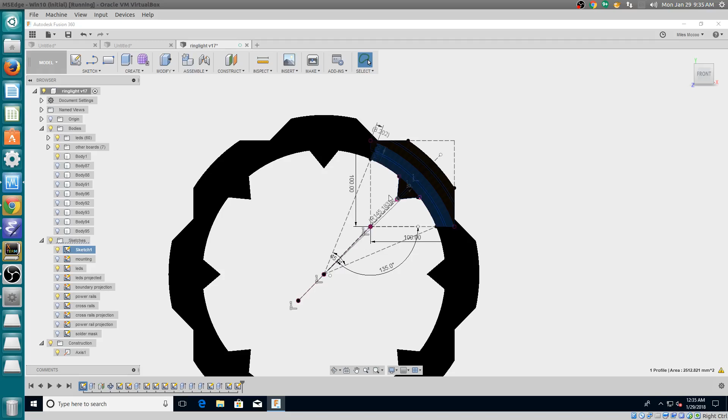Here is the basic design, and in Fusion 360 I can also model that it becomes a ring to ensure that the mounting holes are in the right spots, that everything will come together nicely. Also, it enables me to draw some of these other structures a little easier than it would be in KiCad. So for example, I am able to lay out the placements of the LEDs in a nice ring so they can also look kind of nice.

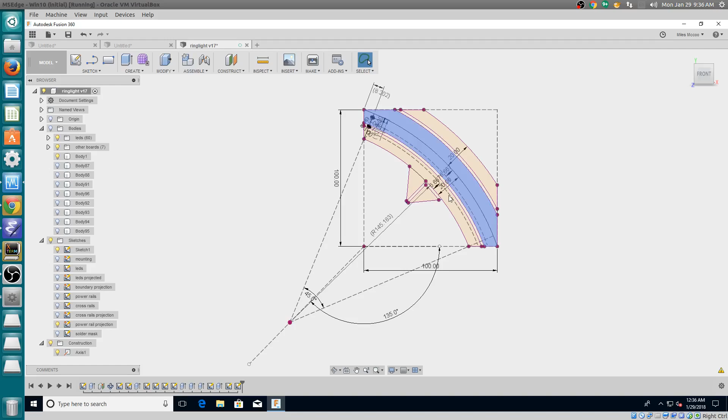I have my power rails here. Let's turn off the LEDs there. I have the power rails drawn. In the middle I have ground. On the edges here I have power and power again. So the next PCB will connect to here. Additionally, I have a solder mask here along the edges, so there's a triangle here. Let's see if we can make that a bit more visible.

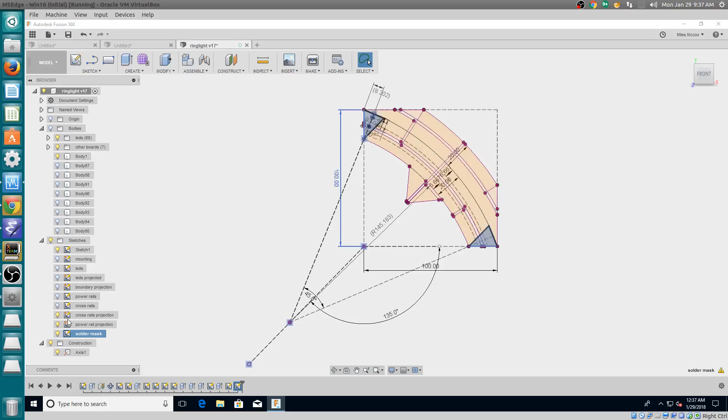There. So a solder mask enables me to solder adjacent boards together, as well as having them connected via these mounting holes. Additionally, I have cross rail. So this power rail is in the back of the design. On the front, I have the other orientation. So as you can see, on the front, I have power going sort of a vertical, diagonal type of direction. So here we have power is on the left and ground is on the right.

Here we see that, let's turn off the masks. Here we see that we have on the bottom here the power rail, and in the middle we have the ground, and then on the top we have power. And again, all of this was drawn in Fusion 360.

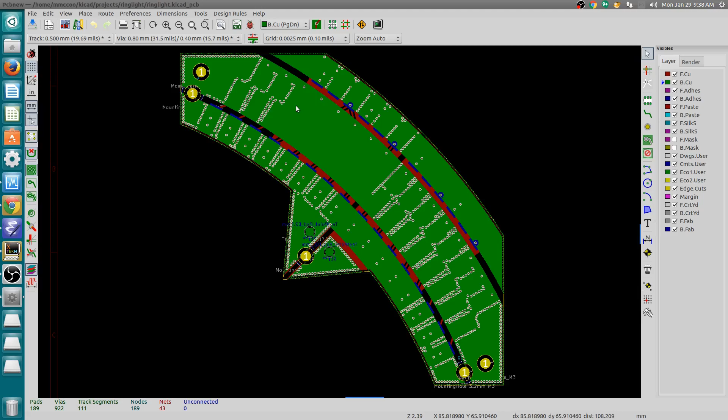Additionally, if we unfill the zones, because these power rails are just zones, a fair amount of routing, we have vias here as well on each of the pads, which also will help to get some heat away from the LEDs. I have some zone fill vias here to be able to connect the front and back power rails. Almost all of this is done in scripting.

From start to finish, once you have the scripts in place, it's maybe a half hour of actual wall clock time to get this design done. So in this video, I will demonstrate each of the scripts, but I will not yet describe how they work. That will be in a separate video. So let's get started. I'll start with a blank slate.

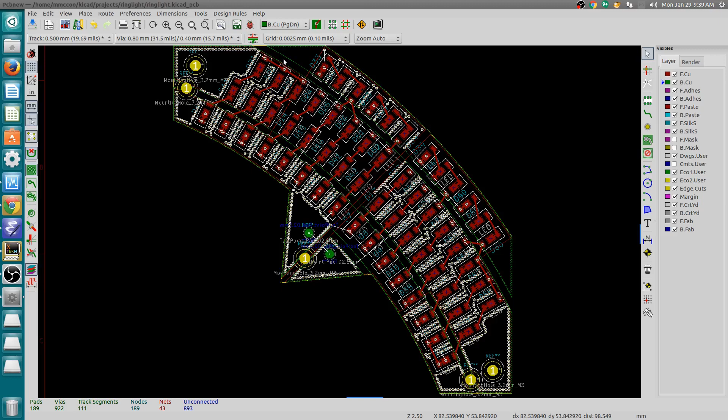Here I have the schematic. It's a fairly uninteresting schematic. It's simply 3 LEDs in series. These will be powered by a constant voltage supply, topping out at 12 volts, but I'll also have a step-down converter to enable less than that. In my experiments, I found that these LEDs draw about a third of their rated power at 12 volts, and even that is fairly bright.

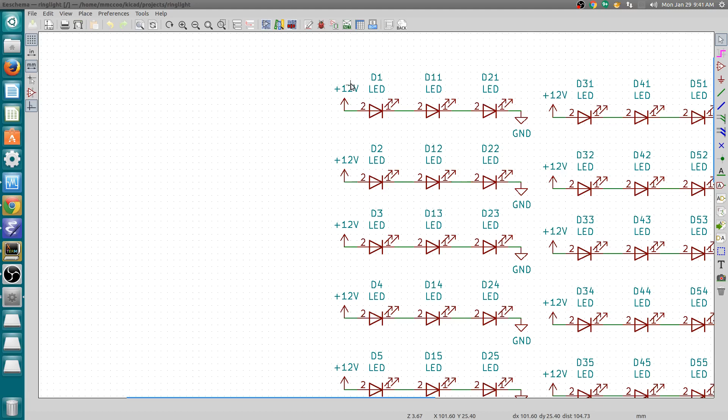If I were to crank up the voltage even further, the power consumption goes up, but the light emission as measured by my light meter does not go up linearly with that. So driving them not so hard actually shows more efficiency. So it's a total of 60 LEDs in this configuration. So let's go to pcbnew. Okay, so I'm starting with an empty

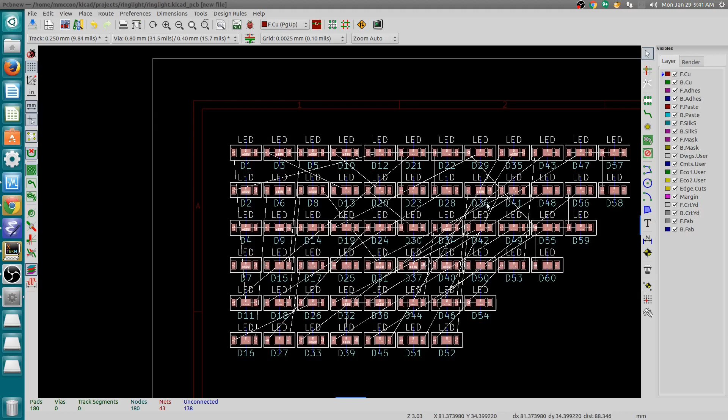design. First thing, of course, we need to do is import the netlist, and here we have all of our LEDs. One thing that I don't really like about KiCad is that the placement that you get here is fairly random, and there's a lot of crossover, and trying to move them into place would really be a chore. So the first piece of automation is a plugin that I wrote that takes the schematic placement and applies it to your PCB.

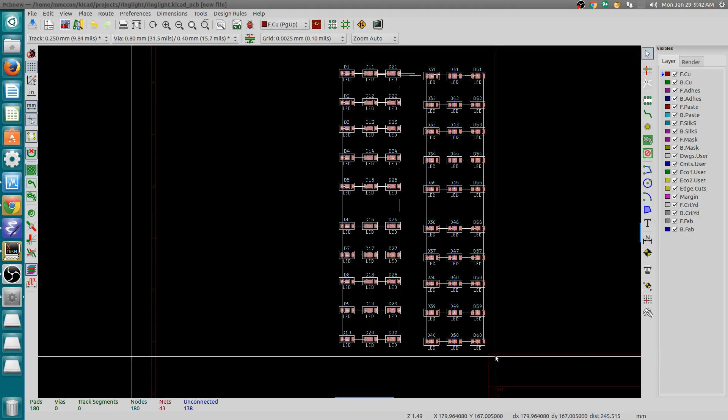Now I know what is what, and also the ordering of the LEDs makes sense, at least relative to the design that I made. All right, let's move this to the side. How do I get the LEDs to match this orientation? Well, here comes the first scripting task. So here we have a sketch that contains the outlines of all of the LEDs.

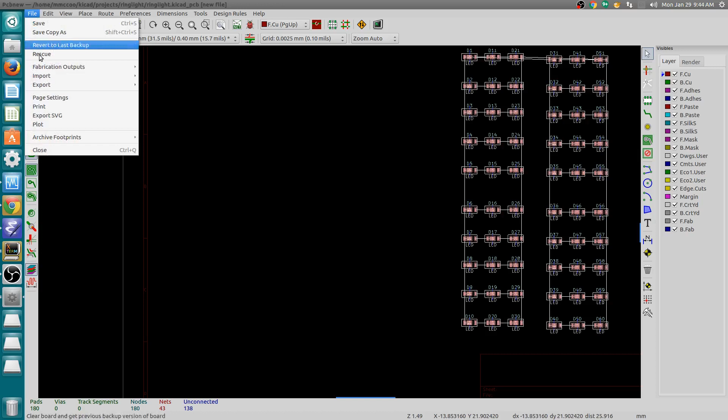So for that, I will export the DXF, save as DXF here, and then I save it to the file. I've already saved it, so I won't do that. Coming back into PCBnew, PCBnew actually does have an import DXF file feature.

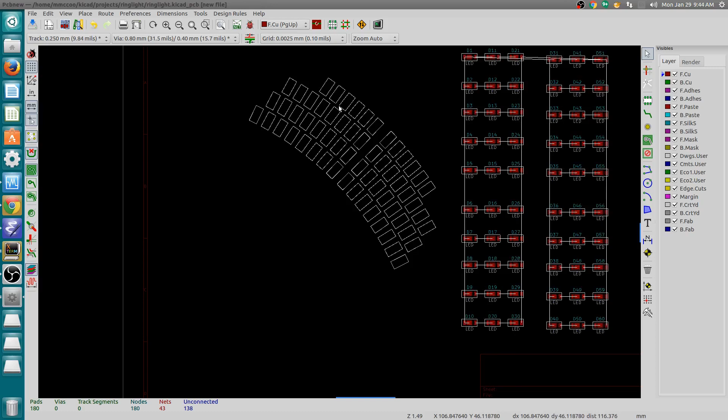Import DXF works for what it is, but I find that there are a number of disadvantages. For example, when you hit OK here, I want to place it at the center of the page. Okay, fine. I do OK. And the first thing it does is it follows my cursor. Okay, well, if I have several layers that I need to overlay, how do I get them to be exactly in the right spot?

So instead, the first scripting task that I want to do is to import the DXF onto a layer within pcbnew. To make DXF import possible, I put together a library that will read the DXF file, and then it will walk through all of the polygons, calling a callback to a particular set of actions. So in this case, what I want to do is simply traverse the DXF, and whenever it finds a polygon, for it to call a callback within segment actions, which in this case says I simply want to put a polygon onto this layer.

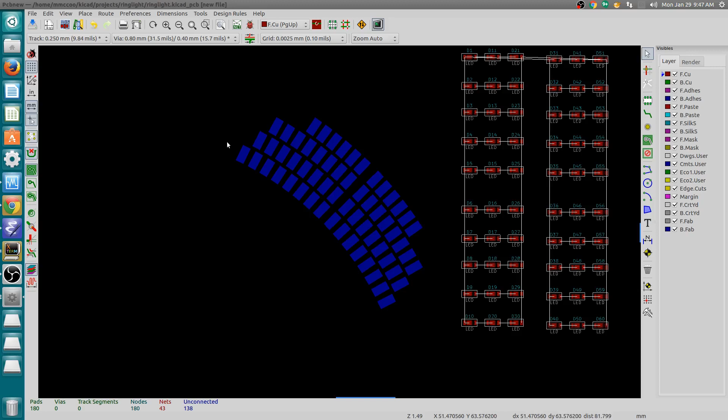Okay, so this is a script that we'll come back to several times. Here we'll turn on the first step, and let's run the script. Okay, so now on the comments user layer, we have each of the rectangles from Fusion 360. At this point, the next step would be to move each of the LEDs into place.

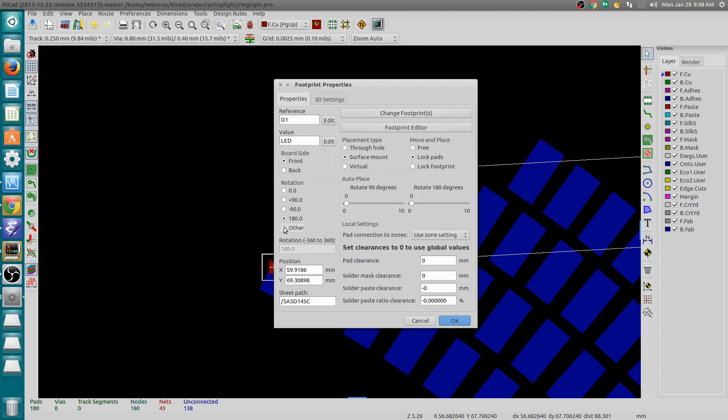Now here you'll see that the orientation of the LEDs is not actually what we had hoped for. So we could go into the edit properties mode here and tell it, hey, I want some other rotation. But what is that rotation? And in this design, that angle is not constant. As it goes around the circle, you'll have an increment. So I have a better way. So what I need to do first is at least bring each of the LEDs here into the proper position.

In order for the script to work, I need each of the LEDs to have its center point be somewhere within the polygon. It doesn't need to be centered, but it does need to overlap. The center point needs to overlap the polygon. So here you'll see that I've moved all of the devices into place, at least so that the center point of each device is overlapping with the placements that we just loaded.

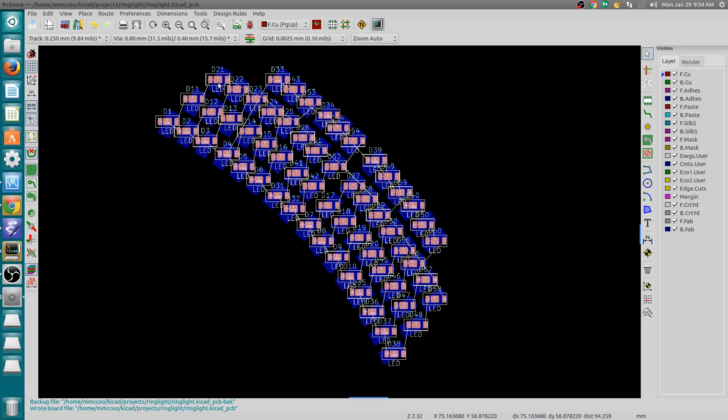All right, so now the next step is to actually orient the devices the way we want. Let's go back to our recipe. We don't need to load in the placements anymore. Now what we want to do is do an orient action. And I will explain each of these functions in separate videos. The traverse DXF, traverse graphics. In this case, you can either read it from graphics you already have on the screen, or you can read the DXF again. So in this case, I am going to turn on the orientation part.

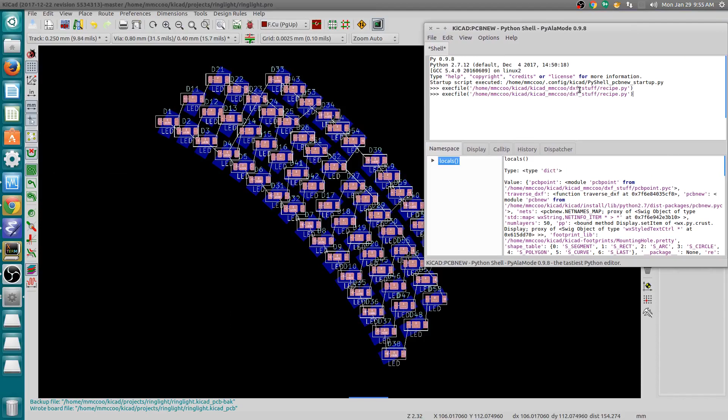Any footprint of this LED 5730 will be affected. So let's go ahead and run that now. Running the same script again, different options turned on, and here you'll see now that each of the devices has been oriented properly. The way that it works is that for each polygon that it finds, it looks to see, is there a footprint of the particular footprint type whose center point is within that polygon? If so, it looks for the longest edge on the polygon, and then it orients the device to be the same direction.

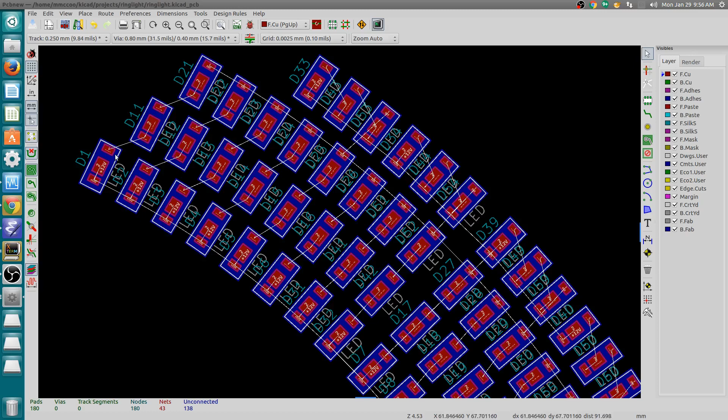So now I have the devices basically where I want them to be. I see here that I have power going along the bottom. I have ground going along here. Since we have 3 LEDs in series, 1, 2, 3, 1, 2, 3, these are all aligned. So these are all the way that I want them to be. I will have power rails along the bottom and top, and ground in the middle. So those will all basically connect themselves.

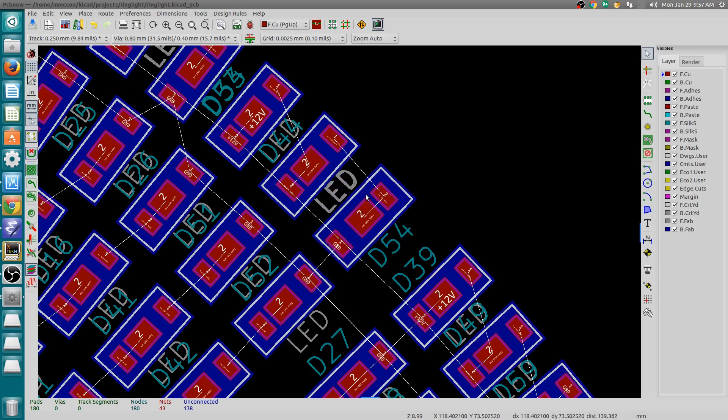The 4 exceptions to this are this one here, for example. The ground here is on the top, but because the power rail here is along the top, I would need to route through here to get to it. So instead, I simply rotate it so that now these 2 grounds are adjacent. The bottom power rail goes along here. So it's a simple wire to wire connection here. I need to do that 4 times in this design. Rotate, rotate, rotate, rotate. Now I have the placement that I want.

Okay, now let's work on the actual power rails. So in Fusion 360, I have here the back layer. I have ground in the middle, power here on the bottom, power on the top. Additionally, I have a small area of ground here because this is where the actual wire connections will be to the board. Again, I save as DXF.

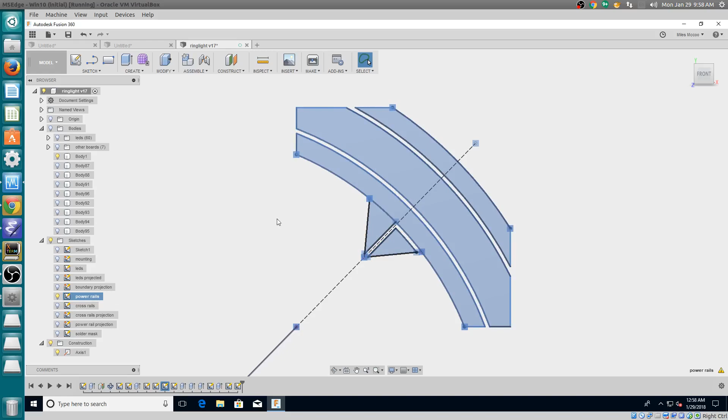I do the same thing for this as well as for what I call the cross rails. So in this case, I have on the left here, I have power. On the right, I have ground. This ground here will extend to the left to enable connection with adjacent PCBs, as well as the power one here on the bottom. This is the front layer of the PCB.

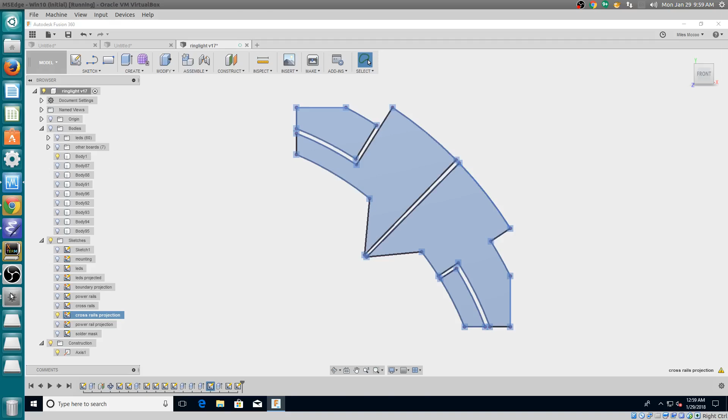Coming back into KiCad, once again, I come to my recipe script, turn off LED orientation. Now I will call traverse DXF again, and the action in this case will be a zone action, saying, hey, I want to create a zone for each of the polygons that you find on the back layer for power rails. Let's turn that on. And the front layer for the cross rails. And while we're at it, let's also add the boundary of the entire design.

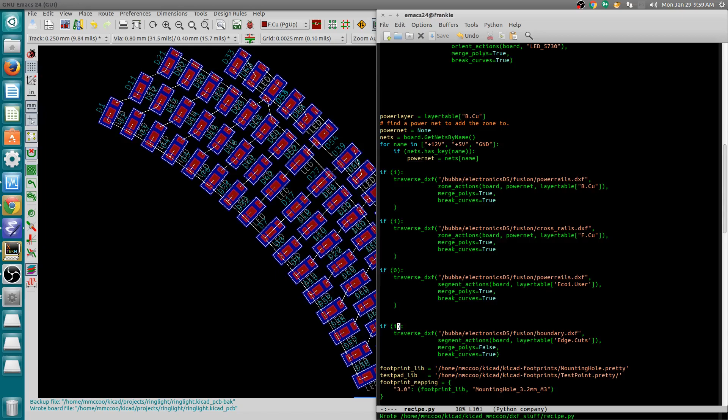Okay, save that again, come back into our scripting console, run that again. So now we have some zones. We fill them. Not everything will fill. The front stuff, of course, will fill because there are the LEDs. For the bottom layer, we don't yet have anything really to fill, right? But again, we'll see that power here goes to the left on the bottom, and then ground goes above that as well on both sides, left and right.

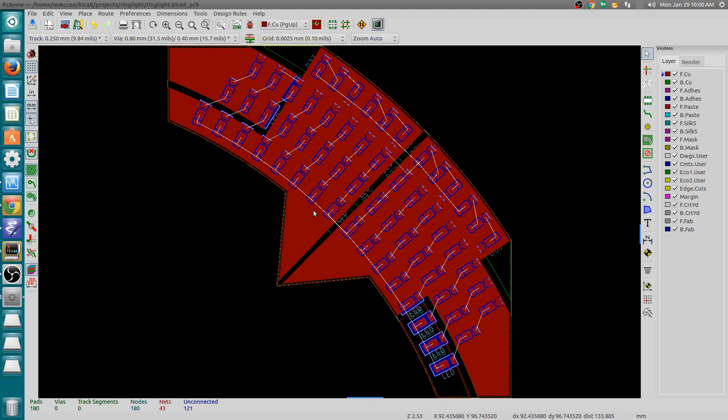But at this point, the script doesn't know which nets each of these zones should connect to. So by default, it just puts everything on ground. So we need to change that. So here, this zone needs to be on +12. This zone needs to be on +12. This top zone also needs to be.

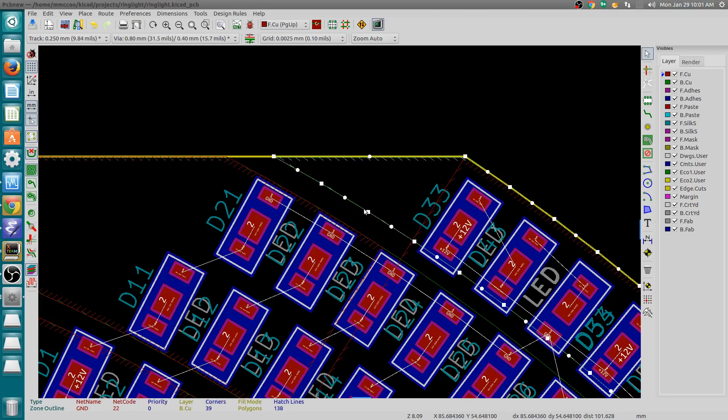Now for this top zone, one thing that I found is a little weird is that Fusion 360 sometimes will give me 2 polygons when I really only wanted 1. I imagine that I actually drew 2 polygons in there somehow. So for that, I will simply take one of them and delete it, and I am left with 1 that I can then change to power. Also here on the other side, the front copper needs to also be +12.

All right. So now let's start making some connections. Because this is an LED board and it will dissipate a fair amount of heat, the way that I want to connect the LEDs to the top and bottom power rails is by having vias for each of these power areas. That will help make the connection to the back layer a bit more robust, thereby helping to dissipate some of the heat. So let's see, how do I do that?

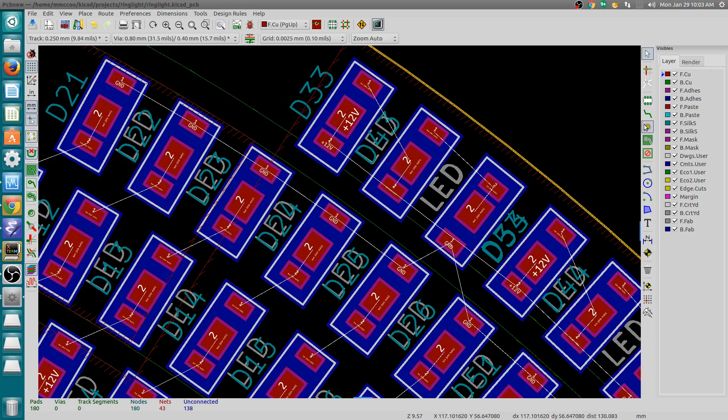Now we could just use this thing here, but in this case, I would like them to be centered. Now I could use gridding, but the problem with that is because I'm on an arc here, sort of a polar coordinate system, there's not really a grid that has the center points in the right spots. Additionally, there's an awful lot of these. For each of the LEDs, well, there's a total of 60, 2/3 of which are power, and each of those has 1 or 2 connections. So again, let's do some scripting.

Here what I have is I go through each of the modules, for each of the pads. If that pad is one of the net codes that I want, power or ground, then I simply put a via in that location. Fairly simple. I've already talked about this on my blog. So let's run it. Coming back again to the scripting console, I have my ground vias script here ready to go. And so we can see that now I have vias in all the right places. They're nicely centered on each of the ground and power pins.

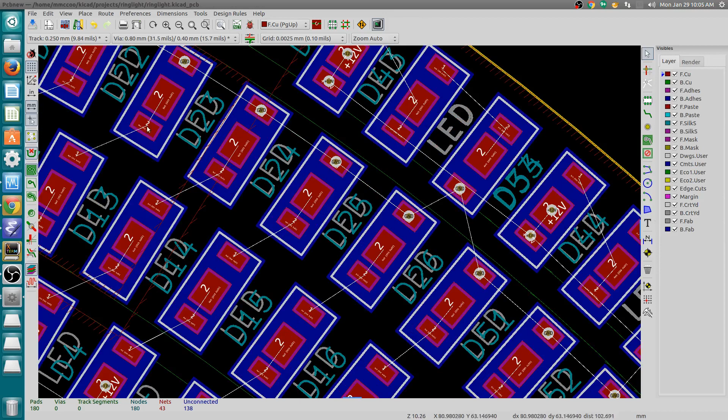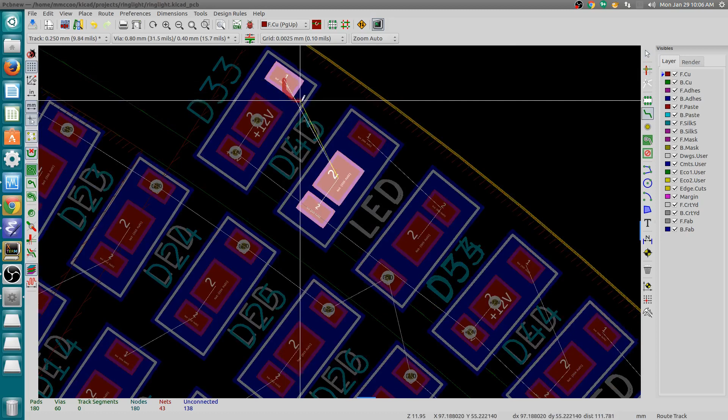Easy peasy. And at this point, I can also do zone fill, and everything will fill. The one exception here is this ground connection zone here, which will be connected shortly. All right, so now we have a whole bunch of nets that need to be connected. Now I could use the point-to-point router, but I found that especially on the non-45-degree placements, getting it to actually route the way I want is tricky. I've tried all of the different options available in the preferences menus, and what I really want is just a wire from here to here, a wire from here to here.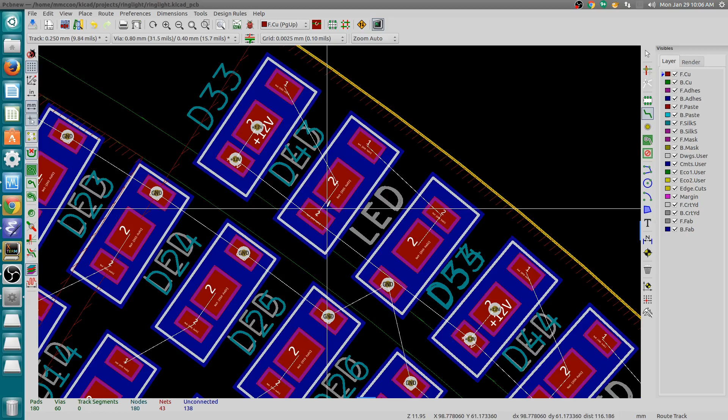Also, even if it's possible to do it with the point-to-point router, there's 60 of these LEDs. It's a lot of work. There's a lot of clicking. Me, I prefer to do scripting. So for that, I have a script that will generate the minimum spanning tree of all of the nodes within a net, and it will blindly make point-to-point connections between those.

It does not try to do any obstacle avoidance. It doesn't try to be fancy in any of those ways. So it's certainly not a general purpose router, but in this case, it does the job. Let me show you how it works.

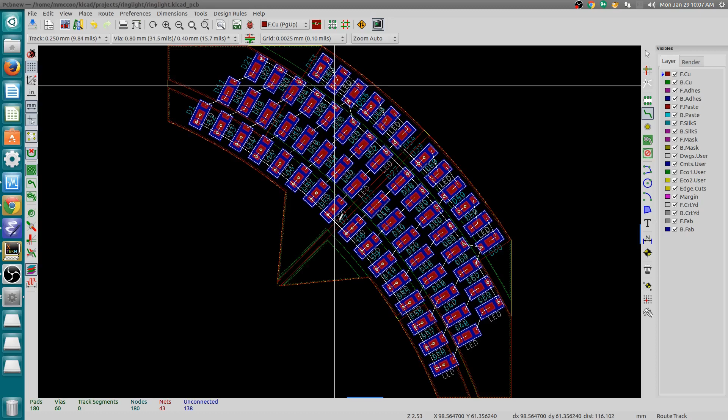So here I have a script. I call it Delaunay because it generates the minimum spanning tree based off of a Delaunay triangulation of the points, which may be interesting, but you probably don't care about. The part that I do want to maybe highlight a little bit is that SciPy is a nice library that provides a lot of routines for computing things like minimum spanning trees and Delaunay triangulations.

And you see here, the script is not very long. First, what I do is I collect which connection points are for each net. So I have a dictionary here of nets, and the nets then is populated with all of the pads in that net. I then compute the Delaunay triangulation and the minimum spanning tree.

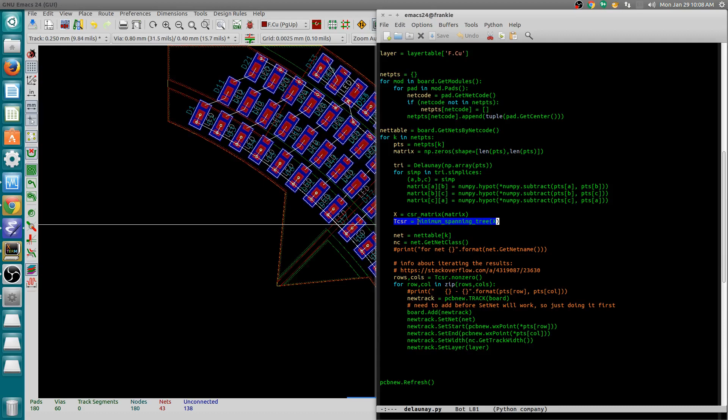The Delaunay part in this case is not actually necessary because minimum spanning tree, if I just give a complete graph, meaning every node connects to every other node, minimum spanning tree will pick out of that complete graph the best set that you need to actually connect everything. So let's run it.

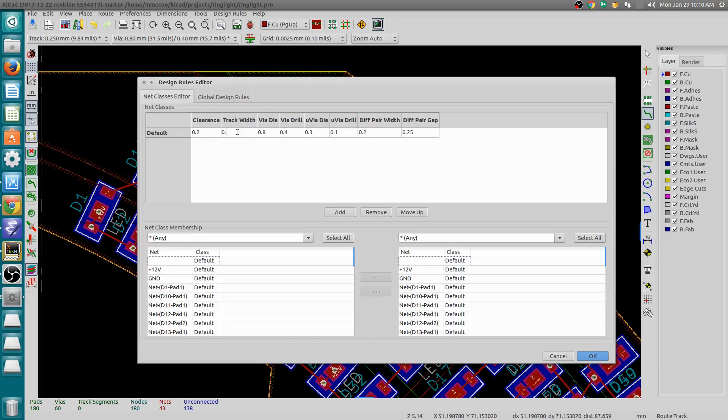Here we are again in the Python shell, ready to run it. So here we see that all of the nets have been routed. But one thing I forgot to do is to change the widths of the nets. I want something a little thicker than the minimum wire size needed. Come in here, change the track width to be double the default, global deletion, remove all tracks, but we don't want to get rid of the vias that we just put.

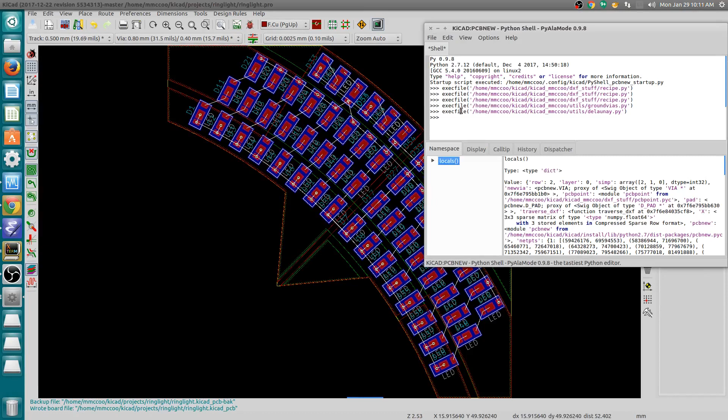So let's try that again. Once again, run the script. Now we have thicker wires. Great. Now, this routing is pretty close. We have my direct connection between the adjacent nets. I have my within these two pads, which are internally connected in the LED. But because it does not do obstacle avoidance or anything like that, I have things like this. So I need to do a little bit of cleanup.

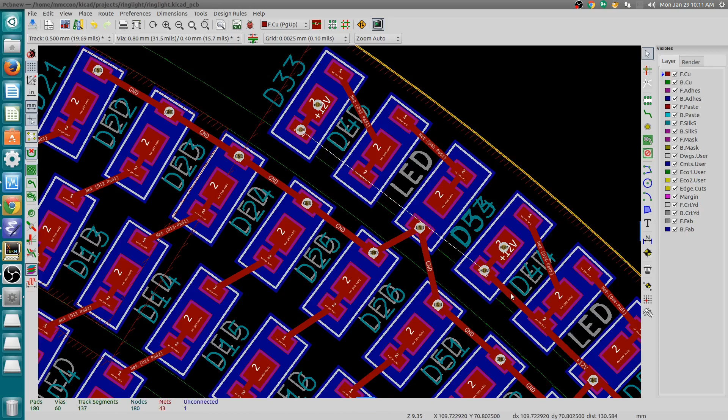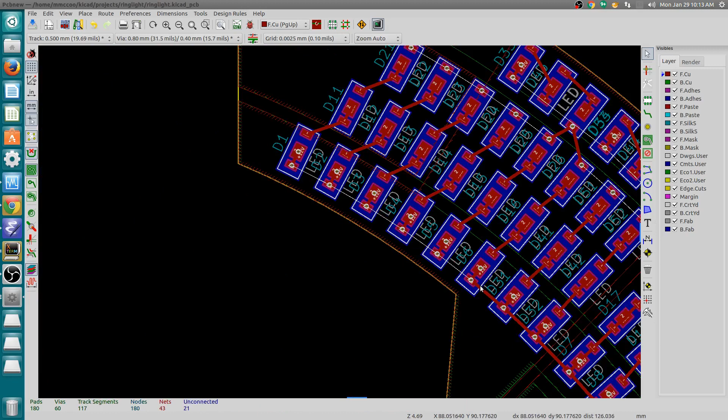So we'll get rid of the wires here along the bottom. And if we do zone fill now, we'll see that these power rails are now broken up a bit. So see here, I have this ground, which while it's legal, messes up my connection between the top here and the bottom. So let's unfill the zones and let's get rid of some of these guys as well. I'm actually deleting a little bit more than I need to. The reason why is that a via fill script that I have later, which does actually take into account obstacles, won't work as effectively if I happen to have these wires.

Here's the routing I have left over. It's a lot easier to delete stuff than it is to put it there in the first place. Filling again, we'll see that we have zones that are much more contiguous. We're now able to connect from the bottom here up to the top. All right, so now that I have the routing between the LEDs, and now that I have the power supply, let's see if we can make the power grid a bit more robust. I have a lot of areas here where I really want to connect between the two layers a bit more, so between these LEDs.

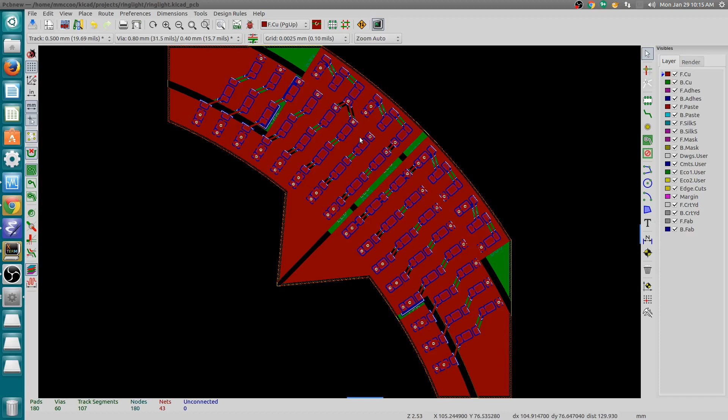So for that, I have another script. This script I will describe in another video, but as a short synopsis, it uses another very nice library out there, Shapely, which does a lot of geometric operations for you. It enables you to merge polygons, shrink polygons, things like that.

So basically what I do is I find the intersection of the top and bottom power rails for each of the nets. From that, I subtract the existing routing and vias. I subtract the LED footprints. So all the portions of the polygon that are left over are places where I can put a via. And finally here at the end, that's what I do. Let's run the script.

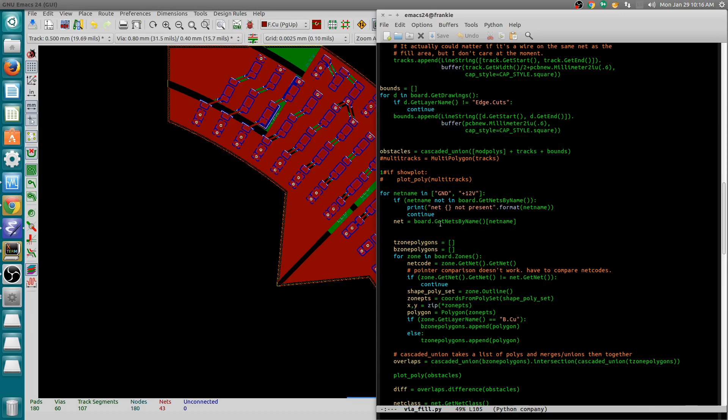Here we are back in the Python shell, and now we have a bunch of vias connecting the upper and bottom layers of the power grid. So here we see that I have power rail along the bottom and power on the left. So they're connecting here as well as here along the top. In the middle, I have ground, and I have ground on the right. A very robust set of vias.

Okay, almost to the end. Next thing that we need to do is I want to be able to connect adjacent PCBs. So in these areas over here, I need to have a solder mask.

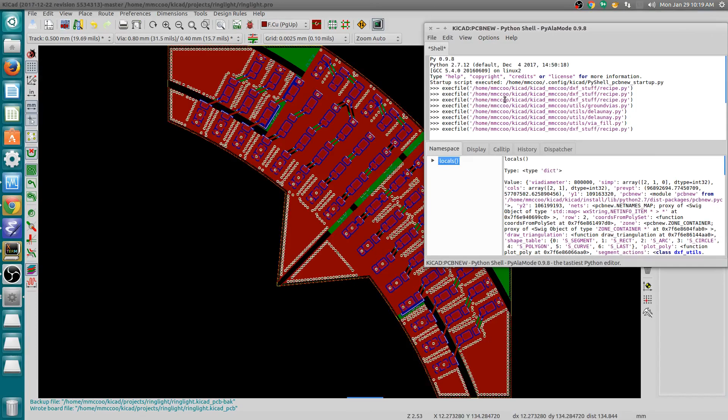Coming back to my recipe, I actually traversed the solder mask DXF twice, one for the front mask, one for the back. Coming back to the Python shell, run it again, and now we see that if we turn off two layers, I have these two solder mask areas, front mask and bottom. So now I will have exposed copper in these triangles on the top and the bottom layers. So when adjacent PCBs touch each other, they will be connected, and you can also have solder in between.

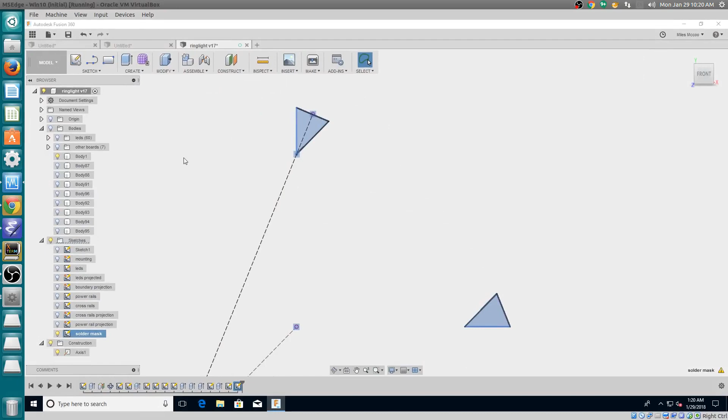Okay, so now the power grid is connected to all of the LEDs. They're able to connect to each other between the top and bottom layers. All the routing is done. The last thing that I need to do is to have the drill holes for actually bolting the adjacent PCBs of the ring light together, as well as here on the bottom in these triangles, this is where the actual wire connections would be. I don't actually need to make those connections on all of them because of the adjacency connection. So again, here in Fusion 360, I have a sketch for mounting holes.

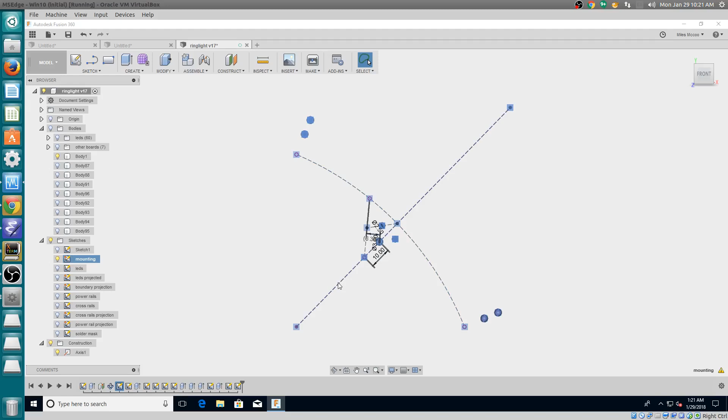And here I have 1, 2, 3, 4 holes for adjacent holes. Each of those are 3 millimeter diameter. Here I have an additional 3 millimeter diameter circle as well, in addition to 2.5 millimeter circles. The diameter here is actually not that significant as long as I have unique diameters for different purposes. I'll show you what I mean by that. Here, once again, I traverse DXF. My action in this case will be a mounting action, and this mounting action takes as an argument this footprint mapping. The footprint mapping says whenever you find a circle with a 3 millimeter diameter, put this footprint in that place.

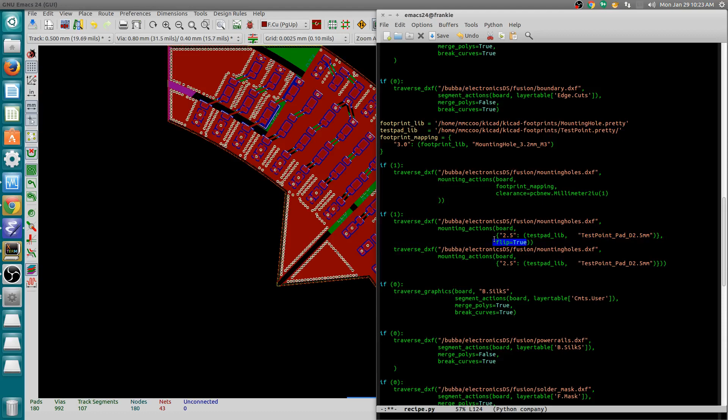So we're going to turn that on. So that will be for the left, right, and bottom holes. Then I will run that same mounting action again twice for each of the circles that are 2.5 millimeters and put a test point in that spot. I will do that twice because I want one on the front and one on the back. For one of the runs, I will actually flip the modules so that it'll be on the back side of the board. Okay, so save again, back in the scripting window, and now we have our test points.

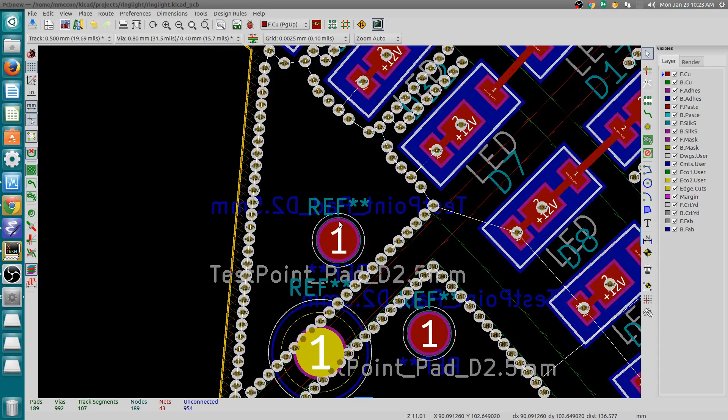And now we have our mounting holes here on the left and right. We have another hole here, which is for connecting the ring light to some sort of a bracket. And additionally, underneath here, I have some pads. Now, I didn't tell it what those should be connected to, so I need to do that now. So go to properties here on the front pad. Here I want plus 12 volts. Do the same thing again for the back pad, plus 12 volts.

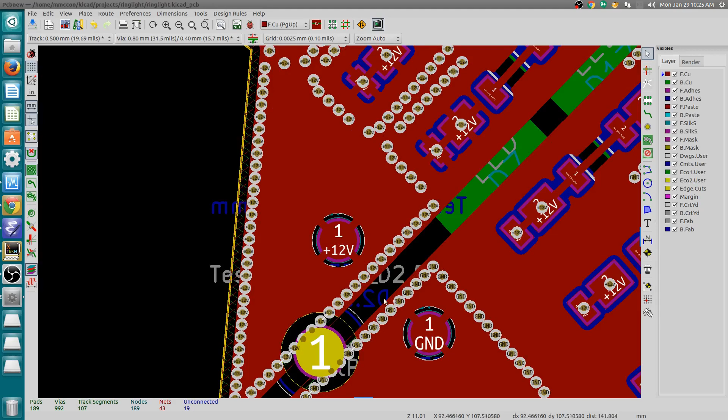Again here on the ground, edit footprint on the front, GND, edit again on the back, once again GND. Refill, and we'll see that now the power is connected to this pad as well as this ground pad. Looking on the bottom, the same is true there as well. So now I have an additional step of cleanup that I need to do here around these mounting areas. Because the via fill was already here, I need to remove these ground vias. And here then again on the right.

So at this point I have what looks to be a completed design. I have all the LEDs where I want them. I have them connected to each other. I have them connected to power. I have some large power rails that connect from one PCB to the next. The boundary of the PCB itself is such that when I connect the 8 of them together, they'll make a nice circle. I have mounting points for bolting them together. I have a solder mask for being able to solder adjacent PCBs to each other. I have lots of vias for connecting the front and back parts of the power. And as you see, very little manual work was actually involved, and that was almost exclusively limited to deleting stuff.

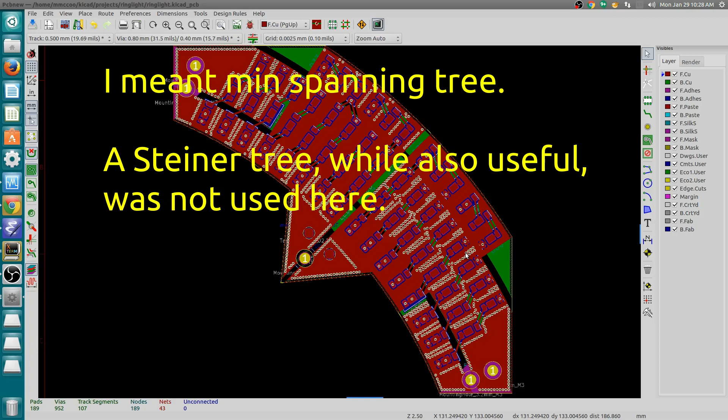In upcoming videos, I will explain in more detail how these scripts work. Anyway, I hope that this gives you some ideas on things that you can do with design automation. Scripting in Python and PCBnew can be a very powerful tool. Some of the things that I did here, like the Delaunay triangulation and minimum spanning trees, may seem a little fancy, but even for things like just connecting the pads with grounds, it's very simple scripts. I hope you found it useful and interesting, and hopefully it will inspire you to put together some automation of your own.